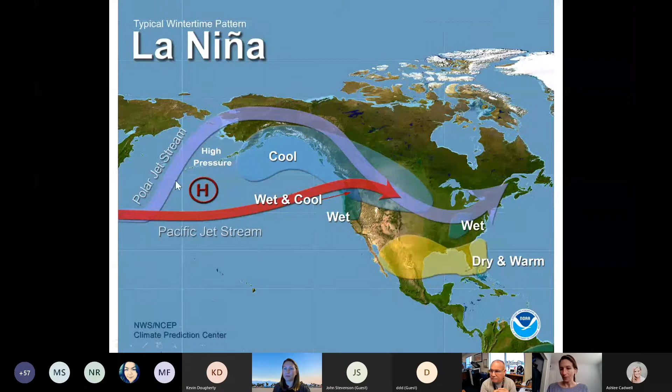But for San Diego, it mostly means we're going to get less rain, it's going to be drier, it's going to be warmer. So what that means for us is that you really want to make sure your facility is ready. We're not going to have as many rain events to capture samples this year. There's not going to be as many rain events to, I mean you don't want this to happen, but to scrub your site, right? You want to make sure that you're the one keeping your site clean and that the rain's not playing a role. That first flush might be one of only like 3 rain events that we get.

Hopefully 3. I think there were a couple years where we only had 2 rain events. And so if in that first flush your sample picks up a lot of pollutants, you're not going to have many chances to kind of make that up or bring down that average in subsequent rain events. So just keep that in mind. You should always be very ready, but I think this year, just keep in mind you won't have as many chances as you may in other years. That being said, weather science is still developing, and maybe we'll have a lot more rain events than we anticipate.

So how do you keep your facility in tip-top shape? Identifying your common pollutants, the pollutants your site might have issues with, and then implementing BMPs, or best management practices, in order to keep those under control.

From visiting a lot of the sites, I've seen there are some main issues that bus sites deal with. Your facility knows exactly what's going on and what you need to address, but I think some common ones are tires and brakes. They can be a source of zinc and copper, which is toxic to organisms and people, and it pops up a lot in facility samples as being close to the limit or a little bit over the acceptable limit.

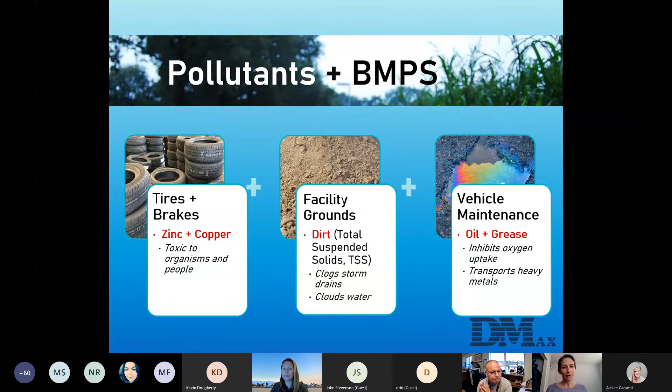When those get into the water bodies, they inhibit oxygen uptake of different organisms, and they can also transport heavy metals, capturing that zinc and copper that you want to avoid. When the rain washes everything away, you not only have oil and grease, you also have higher heavy metal levels. So when it comes to controlling those with BMPs, here are some tips.

For zinc, copper, and I should also mention iron, which these tips can help with too, you can use vacuum assisted sweepers if available, to suck up that particulate matter. If you're using a sweeper by hand, you're not sucking it up, unless you're using a shop vac to supplement the sweeping, which is ideal, because this particulate matter goes in the air and resettles somewhere else, and then the rain will wash that away eventually.

Another tip is making sure you're disposing of your used fluids correctly, and also cleaning those up as soon as possible when you see them on your facility grounds.

Steam cleaning, if you're able to, on a paved area with asphalt, anywhere exposed to rainwater, is a good way to ensure you're getting a deep clean in those areas. Another tip, not always directly seen as connected to heavy metals, but similar to how oil and vehicle fluids transport heavy metals, so can sediments. So you want to stabilize your slopes and landscaping, and repave crumbling asphalt. Both of those can end up being a source of heavy metals.

Something else I heard from one of the schools this year that I think was a really good idea is to consider changing products to something with less pollutant potential. If you have brake pads that you know are giving off one of these metals you're having issues with, looking into an alternative might be a good idea. Then you're not always playing catch up trying to clean up the byproduct—you're actually stopping it at the source.

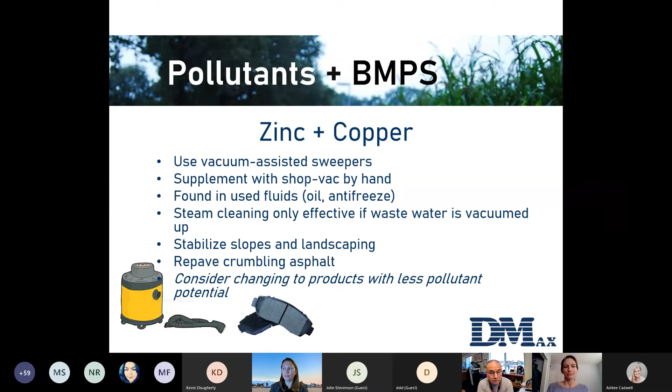All right, so dirt - we kind of touched on it already. It can transport heavy metals and also be an issue downstream in the stormwater system. You want to make sure you're stabilizing your dirt lots and driveways. If you're parking buses on dirt lots, how are you making sure that's stabilized during storm events, that it's not getting transported outside of your lot during dry seasons, and how is your storm drain protected from that sediment? Some things I've seen different sites do is lay down gravel, making sure that when sediment gets hit with rain or run over by buses, it's mostly staying in place. Another is a rumble pad, just to keep your sediment on site and hopefully stabilize it within your own site.

Another is stabilizing slopes and landscaping areas. So how are you going to do that? Making sure your vegetation is holding up to the dry weather of San Diego, getting drought resistant landscaping if you can, or if you're using grass, making sure it's getting the right amount of fertilizer, but not so much that it washes off. I know every site has its own challenges with this, because plants in San Diego can be difficult. But if you've decided that's how your landscaping or slope is going to be stabilized, you just want to make sure that's kept on top of.

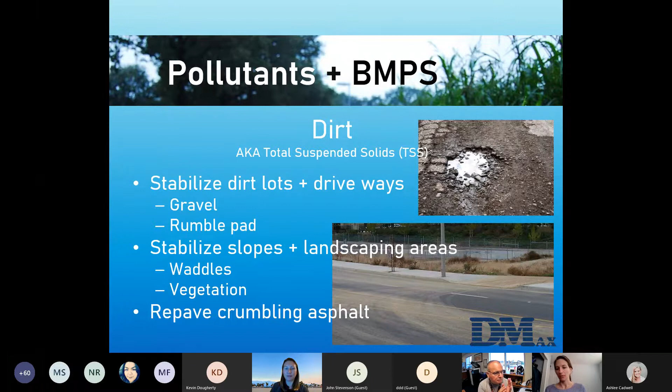And another is securing straw wattles, fiber roll wattles along slopes where you know there's a potential for sediment to move downhill with the force of gravity. That becomes really important. And then lastly, I already touched on it, but repave that crumbling asphalt. It can carry heavy metals, it can be a source of soaking up oil and grease, and it also contributes to your total suspended solids count, which we want to keep low.

All right, and the last one we touched on was oil and grease. Making sure you have drip pans on hand, doing regular maintenance of your machinery. I'm sure everyone wants to make sure their buses are running, so this isn't to say how to run your shop, but making sure those leaks are being checked for on a reoccurring schedule. If you're parking on a sediment or darker area like a parking lot, you may not see those leaks very quickly, so you want to keep an eye out for those.

And then the other thing is making sure you have a spill kit on hand, and not only that, but having a spill kit cleanup protocol. So you see the spill, you put the spill kit down - when are you going to get that cleaned up? When is that going to be removed, looked into? How long does it take? In a lot of industrial sites I've been to, the spill kit is applied, which is great, that first step is there, but then it gets kind of forgotten. And if it rains, not only is the grease or oil that was there washed away, but also the material that was used to soak it up. So it can be an issue that multiplies upon itself.

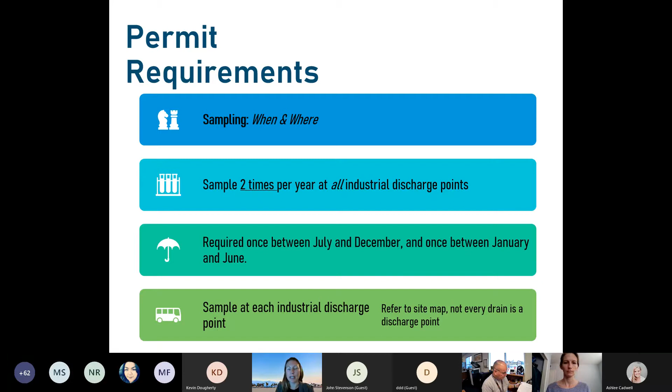Always be prepared, of course. So in our business, we're watching our weather reports all the time.

And sometimes, when rain is coming, it can be a little surprising. So you want to make sure that your bottle kits are ready. Every year, during the summer, is a good time to make sure all of that is prepared.

We don't get too excited, especially in California, unless the percentage reaches about 40%. That's when we start to mobilize and schedule our sampling staff to go out to facilities where we take samples ourselves. You need to have about 0.1 inches in order to get runoff from a paved site. If you have an unpaved or largely unpaved site, it will take a little bit more than that to get runoff. But a paved facility at about 0.1 inches is when you start to get flow.

I do send out pre-rain alerts, and I generally will attach a pre-rain checklist. This is not something required, just an additional tool for you to use to make sure that you're prepared and that you have as low pollutant discharge potential as possible.

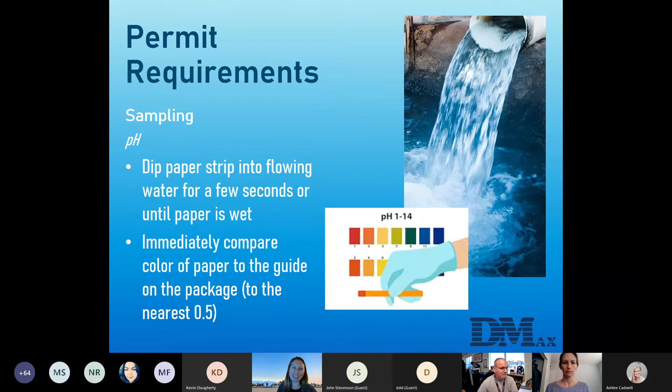Okay, you do want to measure your pH before handling your sample jars. Can anybody raise their hand and tell me why that is? Either unmute or put something in the chat. Any guesses? Because if the pH is off, then don't bother sampling. No.

So that's a little tricky there. If the pH is off, that may indicate there are pollutants in the water, but it doesn't keep you from having to take a sample. So I do want to make sure you are still getting your samples, even if your pH is high or low. If it is high or low, what you want to do is take it again, you want to be sure.

But the reason not to take your pH after starting to take your sample is because the sample jars have acid in them. And if you're handling the jars, sometimes there's a small amount of acid residue that will coat the outside of the jars. Sometimes you see this on the inside of the plastic bag, you'll see a little bit of liquid. So if you are touching those jars with acid and then you're touching the paper, the paper may pick up some of that acid, and so it may read artificially low.

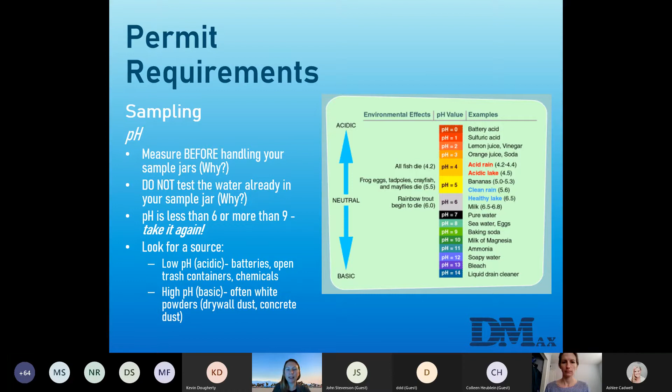Sampling protocol: make sure you're wearing gloves, obviously for your own safety. You don't want those acids from the bottles getting on your skin, but you also don't want anything from your skin getting into your samples. So wear gloves, wear clean gloves. Don't try to reuse your gloves - have a stock available to you.

Fill your bottles directly if you have a good setup for that. So if it's pouring out of a pipe, which I know a couple of you do, you can fill your bottles directly from that water. If you don't have that setup, use a clean container which has been rinsed three times in sample water. In your kits you also have empty sterile bottles which can be used to fill the other bottles. This would be a bottle without a colored dot, and generally they'll note on the label a 0 or a circle with a slash through it to indicate nothing is in that bottle. You can use that bottle to fill your other bottles, and then you'll need to fill that original bottle as well.

You'll need to fill your bottles to the neck, where they start to curve in for the lid, so make sure all your bottles are filled to the neck. The bottles with stickers contain that acid we were talking about, so make sure not to overfill, because you don't want any of that acid leaving the bottle. It needs to stay in the bottle to preserve your sample.

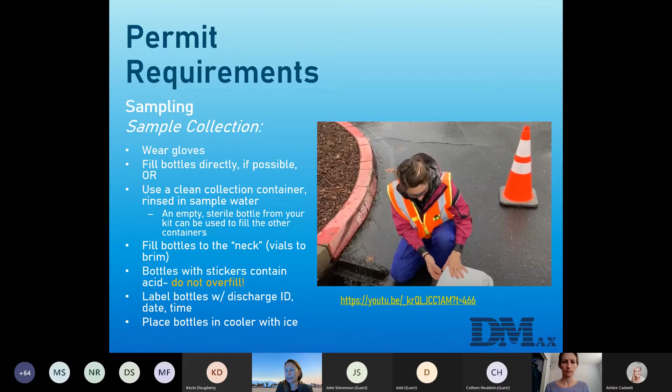Those bottles need to go into a cooler with ice, and they need to be chilled until they reach the lab. Just one small note - if you're not going to be taking them immediately in a cooler with ice, they can go in the fridge until they need to be transported. Then when they are transported, they should be in a cooler with ice.

If you have any small vials - this is only for facilities conducting fueling on site - those small vials need to be filled very carefully to the brim. This is a little delicate, so take your time. They should have virtually no air in there, and they have an inverted lid, so when you put it on it will take away that little indent in the top. Once you fill the bottle to the top very carefully, put the lid on and turn it upside down to see if there are any bubbles. If there's a bubble, add more water and check again. Be very careful not to overfill, because they do contain the preservative.

Sample delivery - the lab we use is called Enviromatrix. They recently moved within the last couple of weeks, so their new address is very close to their old address, same general area, but the new address is 9590 Chesapeake Drive, Suite 5. Has anybody visited the new lab yet? I don't think so. Okay.

You do need to make sure that your samples are dropped off within 48 hours. If you have any bus washing going on site, the shortest holding time is for soaps. So MBAS is soaps, and that does require drop off within 48 hours.

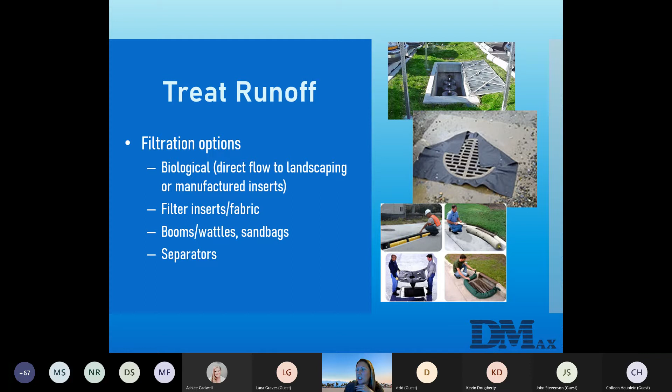There's different types of these. I won't get too into detail, but they can be very involved, like these subterranean vaults up above here. They can be less involved, such as filter inserts and fabric, media inserts, etc. There's also some wattles and some booms at the bottom there.

Some examples, some things that can occur at sites that are pretty low cost. Just helps to slow runoff down, and anytime you're doing that, you're going to allow time for those pollutants to settle. If you have a berm, these are some good examples here.

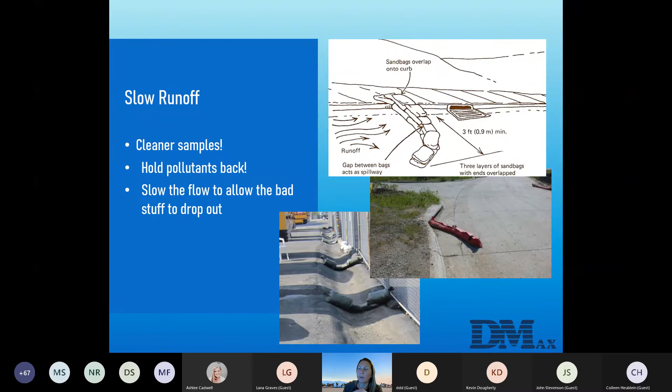Dictating how those should be arranged, they should always be angled up towards the path of flow, so that you don't get the redirection of the water around your berm. You want the water to hit the berm, slow down, and then slowly either flow through if it's a gravel berm, or go over if it's a sandbag or a different type of boom.

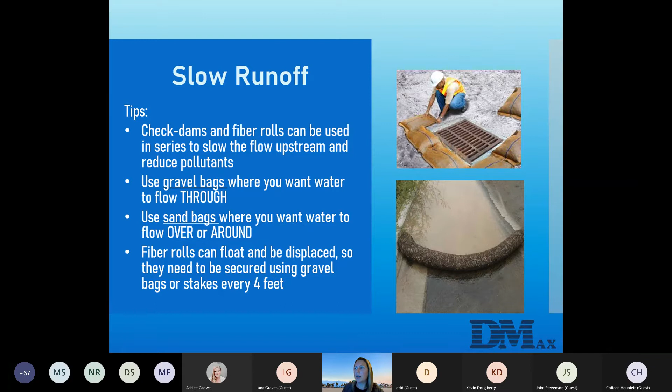So these are pretty effective. As a general note, use gravel bags where you want the water to flow through, and use sandbags if you want it to flow over or around. Obviously, the sand does not allow the water to flow through as easily as the gravel, which has those open voids between the rocks. Also, fiber rolls can float and can get moved around, so do secure those using gravel bags, or if they are on pervious ground, you can stake those down, about every 4 feet.

If you are able to eliminate runoff, then you don't have to take samples. This has been effective in some places where they're able to redirect into landscaped areas, and in those ways, at least during smaller storm events, which is pretty typical in San Diego, you won't have any runoff because it's all able to infiltrate. Because if the water doesn't leave your property, you don't need to sample it. So that's just a good thing to keep in mind.

A few districts have been dropping off of our group to their benefit because they're able to get no exposure. That means all industrial activities and materials are contained, or within cover and containment, or areas draining to sewer. This has been achieved most often by erecting roofs over any of their maintenance areas or storage areas. So to get no exposure, everything related to vehicle maintenance, fueling, or washing has to be done in completely contained and covered areas.

And again, that just requires an annual recertification if you achieve that. So it's very beneficial. Obviously, building structures can be expensive.

Just keep in mind the cost of maintaining your permit compliance includes the permit fee every year, our group fee, and any costs related to extra events you might have. So it may be cheaper if you aren't having issues, but once you start getting into level 1 and 2, where things get a little more expensive, that's especially encouraging to try to get no exposure, because it's a little more certain compliance-wise.

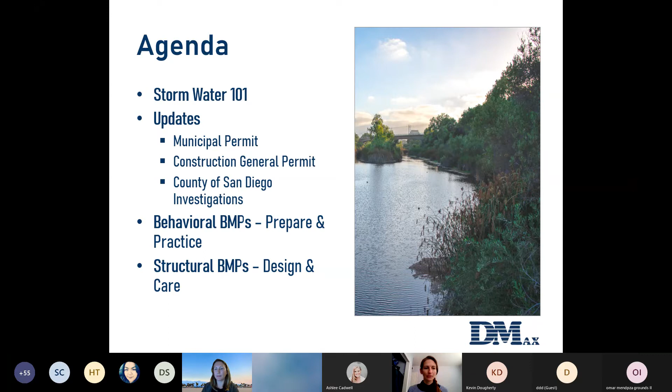So diving right in, Stormwater 101. For those of you guys who are in the industrial, this will be a little familiar, but for the municipal group, I want to make sure to go over this. So what is stormwater? Rain. It's coming out of the sky and then it's hitting all of our built surfaces and non-built surfaces, right? But we are concerned with the water from the point it makes contact with the earth until it reaches our water bodies, creeks, rivers, bays, lakes, oceans, estuaries.

And what is the big deal? So the main thing here is that stormwater is not treated by the sewer system or really by any system right now, except for the ones that we put in place, right? So if we have structural BMPs, that's treating it in a sense, but otherwise all of that runoff that's hitting our roofs and our driveways, it's picking up pollutants and it's just going straight out to our water bodies through the outfalls and different things like that.

And then the other is that excess runoff contributes to channel erosion, which can be an issue for infrastructure and ultimately ends up being a municipal issue as well as a pollutant issue because it's transporting sediments and the heavy metals those sediments carry out to water bodies. And we have a quick clip on this that I think is kind of a cute way to think about what's the big deal, with respect to rubber duckies.

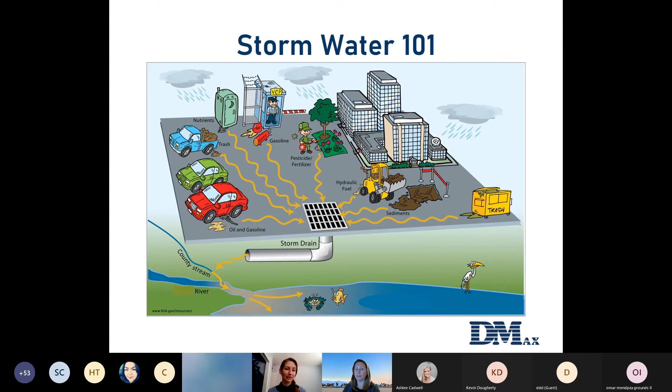What's the big deal about all these pollutants? They're byproducts, so why do we care so much? Dirt ends up clogging our storm drains, becoming a municipal issue. And once it reaches downstream, in San Diego we don't have many water bodies because we're a drier climate, but that makes it even more important that our creeks and smaller, more delicate water bodies aren't smothered by sediment coming through the storm drain system.

Metals are carried in the sediments, also coming from machinery through daily use and wearing down parts, and those end up being toxic to aquatic life. It messes up their neurological processes, which skews ecosystems, and suddenly we're out of balance, with one more natural process not functioning like it used to.

Leaves and grass seem pretty harmless — you mow the grass, the residue is left there. Why is this an issue? When it gets into your storm drain, it decomposes after going through the system, and while it does, it takes up oxygen. Again, it's a disruption to downstream ecosystems, and it can also cause clogs and backups in the storm drain system.

Oils and soaps, same as metals, mess up life downstream. And bacteria definitely impacts both people and animals — how many water bodies do we have that we can swim in, and how many do we actually want to swim in? Even the ocean is off limits after a rain, because we know what's been washed downstream, we all see it, and we don't want to go in it. So minimizing that impact as much as possible is definitely ideal.

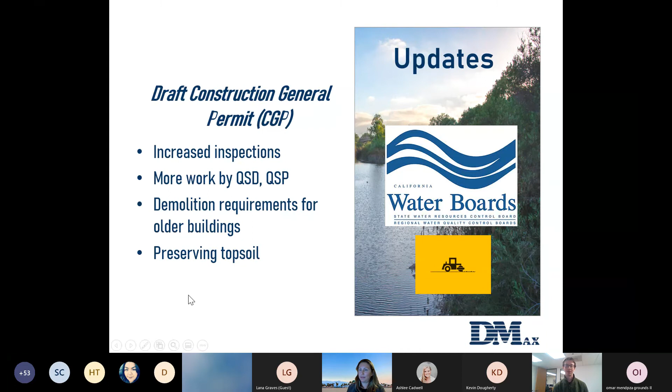They're also looking at ways to change grading a little bit so that you don't lose topsoil on the site to the extent that you can. I think that one's probably fairly manageable, but may require a little bit of creativity with your designers.

And then a couple more changes. Like those of you who were in the industrial training, they're also incorporating TMDLs into the construction permit. In our area, there are only two TMDLs, or two regions, that they're incorporating. One is Chollas Creek, which is a fairly small part of the county. That one is something we're going to watch and maybe comment on, because you would be required to do monitoring for metals, and although the limits are not extremely low, if you exceeded them, they're an effluent limit, meaning you would get fined immediately upon exceeding the limit.

That's not the same as an action level where you have a chance to fix it — in this case you would just immediately get fined. And then the Los Penasquitos Watershed, which is more or less the area along the 56 corridor, you would have to estimate the amount of flow you got off your site for one storm during the year, which would be a little bit of work, but there's no regulatory standard on the amount of flow you'd need to meet, so that shouldn't be too bad.

There's water quality monitoring you need to do if you're in Chollas Creek. But for projects anywhere else in the county, you would not need to do anything with TMDLs. So I think most of the projects you all have would probably not be affected by this. But if you are in the Penasquitos area or the Chollas Creek area, you would have a little more work to do. The other statewide change they're making is the trash amendments.

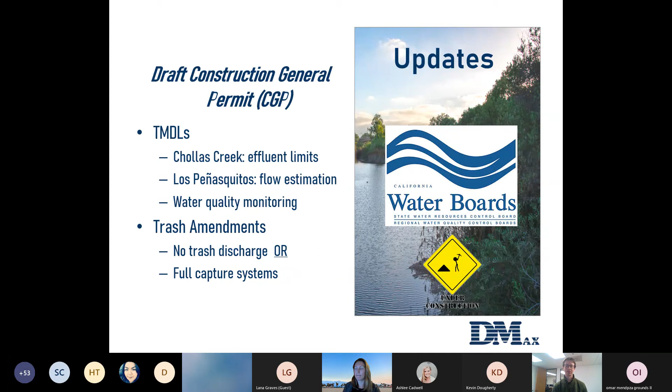They're pulling that into this permit as well. You either have to prove that there's never any trash that leaves your site at all, which is probably pretty challenging for most construction sites, or you would have to install trash screens called full capture systems at all your discharge points, which would create some additional expense. We'll see if that one stays in the permit and exactly how that gets fleshed out when they proceed with the adoption process. But that one potentially could increase the costs.

So the timeline for this is this past November, that's when they released their preliminary draft, which is the one we've been able to see so far. They're going to have a more official draft that will incorporate some of the feedback they've gotten on the preliminary draft sometime this spring. They're going to have a public workshop and a hearing with the state board staff in Sacramento sometime spring slash summer, probably more summer. When they say spring slash summer, they usually mean summer. And then later in the summer or possibly into the fall is when they're looking at adopting the new permit.

So it wouldn't go into effect immediately, but probably relatively soon after that, people would need to start meeting the new permit requirements. So if you have any construction projects that are supposed to start sometime within around the next year or into 2022, keep an eye on this one, because the requirements may be changing at least a little bit for those projects.

And that's all I got. Does anyone have any questions before we go back to Annika for this one? Sounds like no.

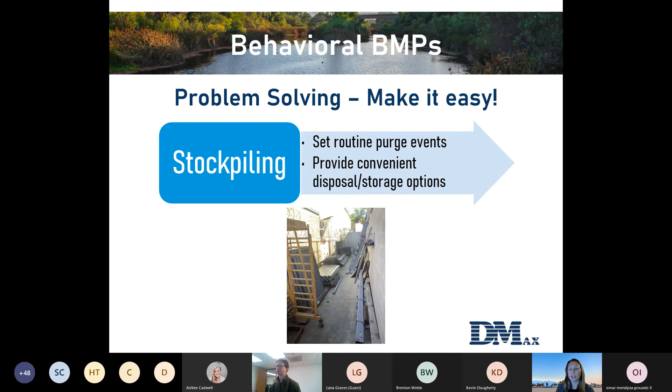Provide convenient disposal and storage options, like metal recycling bins or dumpsters. If you think you may need these items in the future, try to provide a place that's safe for them to be stored, such as underneath a permanent roof overhang or awning.

Dumpsters do need to be covered. If you are getting a larger roll-off type of dumpster, try to have a plan for how it will be covered before it arrives. These dumpster disposal companies do have lidded dumpsters that can be provided. Otherwise, if you have a canopy or roofed area where the dumpsters can be located, that's a good option as well. I know the lidded type can be more expensive, so if it has overhead cover, you don't have to worry about that.

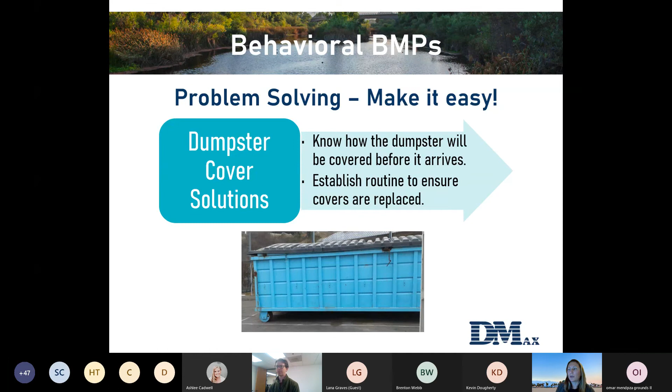Make sure you are checking this occasionally during your regular site checks, making sure the lids are intact. This applies to smaller dumpsters as well, making sure if they are missing a lid or have developed cracks or leaks on the bottom, that you're getting those dumpsters replaced.

Some special programs, like auto shops, pools, and art programs, anytime you've got something with a large amount of materials, potentially chemicals, paints, automotive fluids, etc., it's really good to involve the instructors of those programs. These are great programs, we want to continue to support them, but one thing that helps get this across to the instructors is that the kids learning these skills are going to need to know how to do them properly in the real world as well.

So if they do go on to be mechanics, they should have proper procedures in place as well, and know how to handle hazardous wastes, etc. Again, provide convenient solutions in the same way, making sure they have interior spaces to store things, so they aren't relegated to a back lot for storing everything.

We've had some issues with irrigation systems in the past as well. Leaks and overspray are typical problems we see. Note that irrigation runoff is not an allowable discharge, it's not clean rainwater, so it's not allowed.

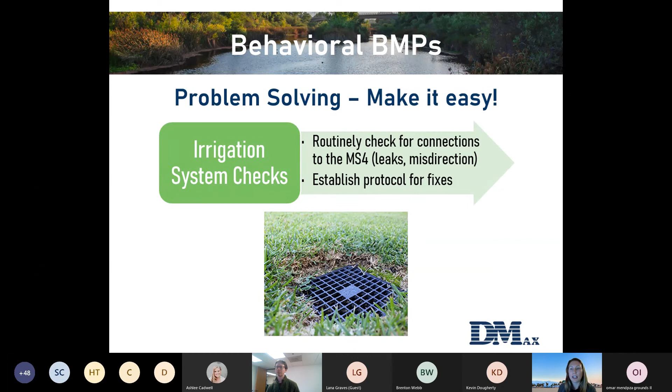You do want to make sure you're routinely checking those. Kids can kick the sprayers off and cause a whole host of problems, so make sure they're checking them periodically. Also, this tends to happen after hours, so if you come in the morning, pay attention to where those wet stains are. If you see it going across the sidewalk and down the street, make sure you're checking those irrigation systems as well.

Any questions on the behavioral section of BMPs?

Okay, so we'll get into structural BMPs. Several of you do have, especially at newer sites, some of these structures installed. I wanted to go through this because there can be a bit of a disconnect between the installation and then down the line, the ongoing maintenance of these devices.

First you want to identify the goals of what you're trying to achieve in that area, and make sure that your engineer is picking the right type of solution for that. So sediment sources are going to clog up a pervious infiltration area pretty quickly. If that's your issue, it may be better to choose a different type of device. That's kind of where we're going with that idea.

And then preparing for future maintenance. When these things are put together in the plans, they should include indications for the type of maintenance to be conducted and the frequency that should occur. Make sure that gets translated into your maintenance department so that they understand how often they should be checking.

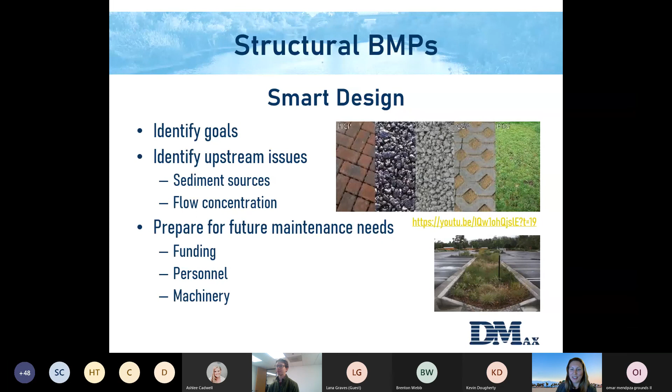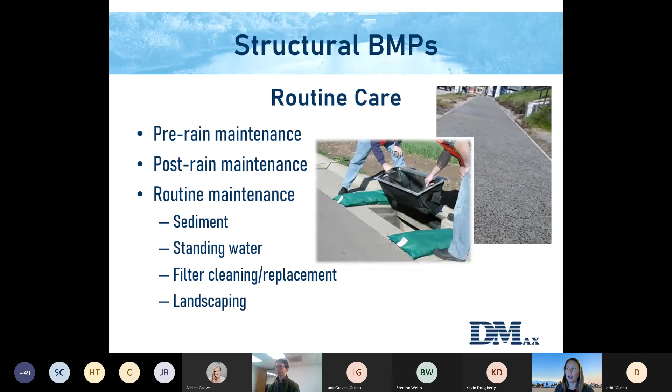Okay, so I went through that a little bit quickly, just to make sure we're within time here. Does anybody have any questions at this point?